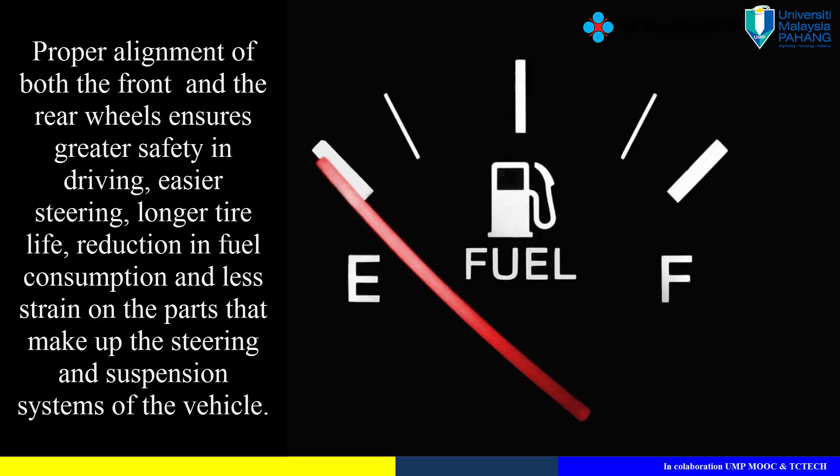Proper alignment of both the front and rear wheels ensures greater safety in driving, easier steering, longer tire life, reduction in fuel consumption, and less strain on the parts that make up the steering and suspension systems of the vehicle. The proper alignment of the suspension or steering system centers on the accuracy of several key angles.

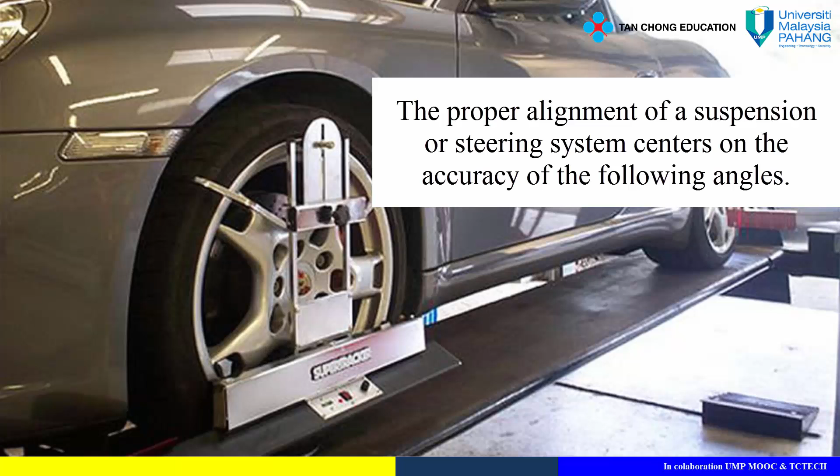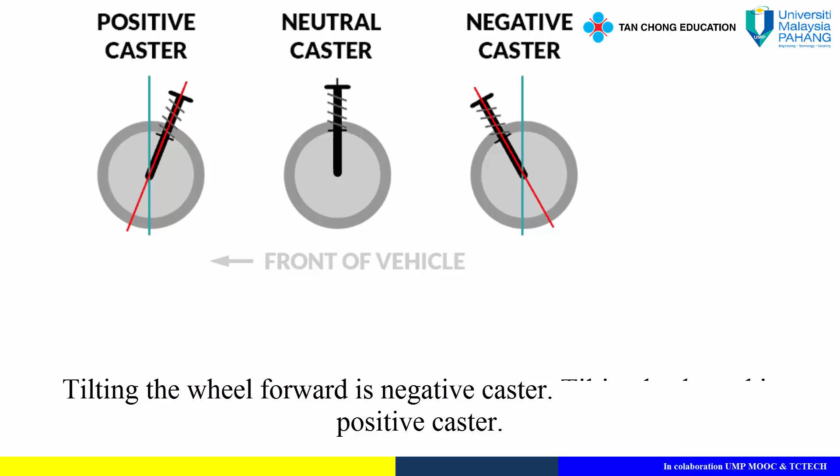Caster is the angle of the steering axis of a wheel from the vertical, as viewed from the side of the vehicle. The forward or rearward tilt from the vertical line is caster, and it is the first angle adjusted during an alignment. Tilting the wheel forward is negative caster; tilting backward is positive caster. Caster is designed to provide steering stability.

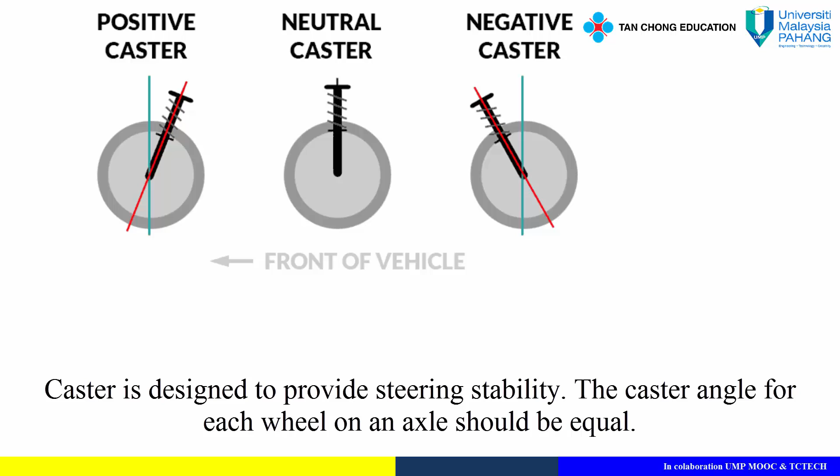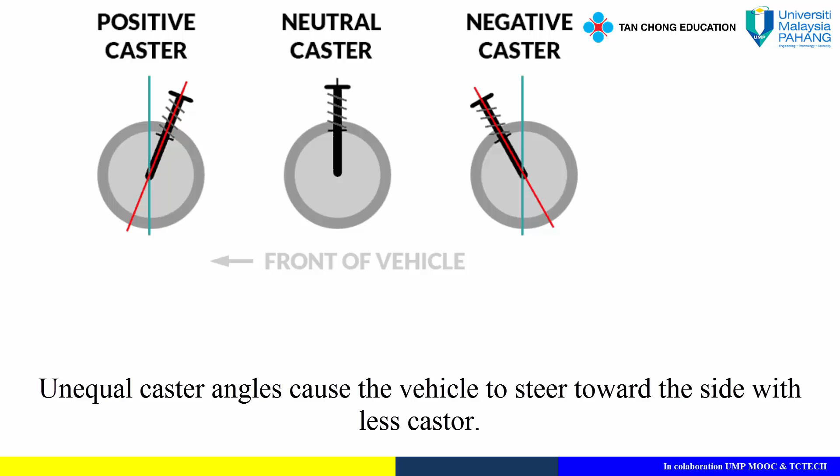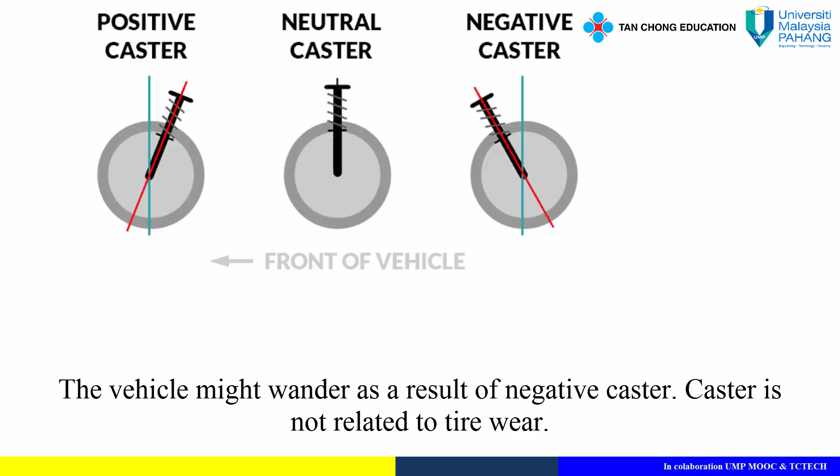The caster angle for each wheel on an axle should be equal. Unequal caster angles cause the vehicle to steer toward the side with less caster. Too much negative caster can cause the vehicle to have sensitive steering at high speeds, and the vehicle might wander as a result. Caster is not related to tire wear.

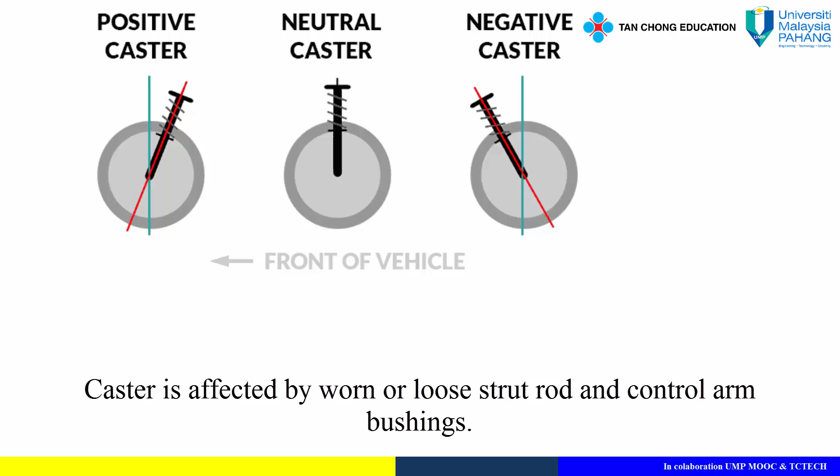Caster is affected by worn or loose strut rod and control arm bushings. Caster adjustments are not possible on some strut suspensions. Where they are provided, they can be made at the top or bottom mount of the strut assembly.

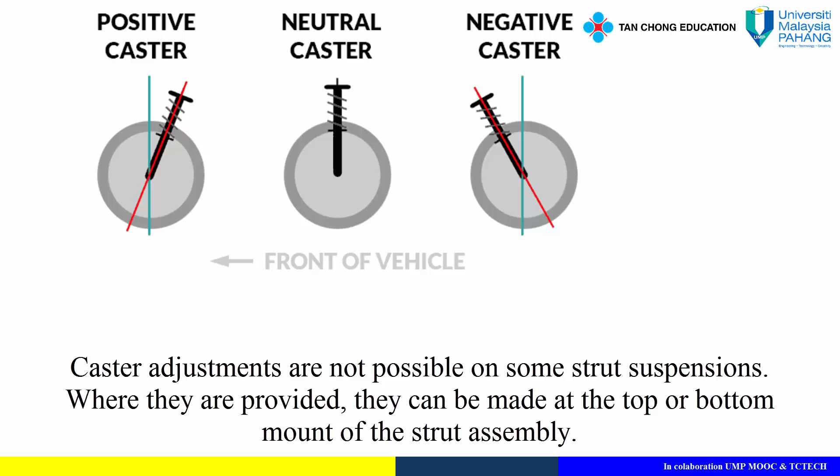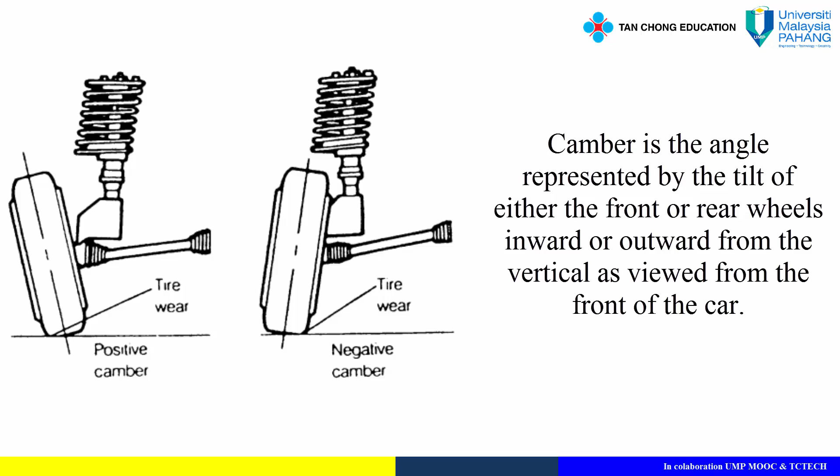Camber is the angle represented by the tilt of either the front or rear wheels inward or outward from the vertical, as viewed from the front of the car. Camber is designed into the vehicle to compensate for road crown, passenger weight, and vehicle weight.

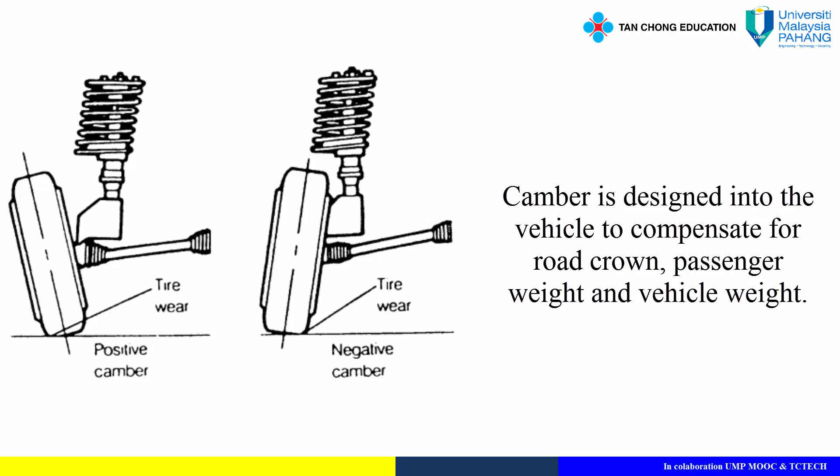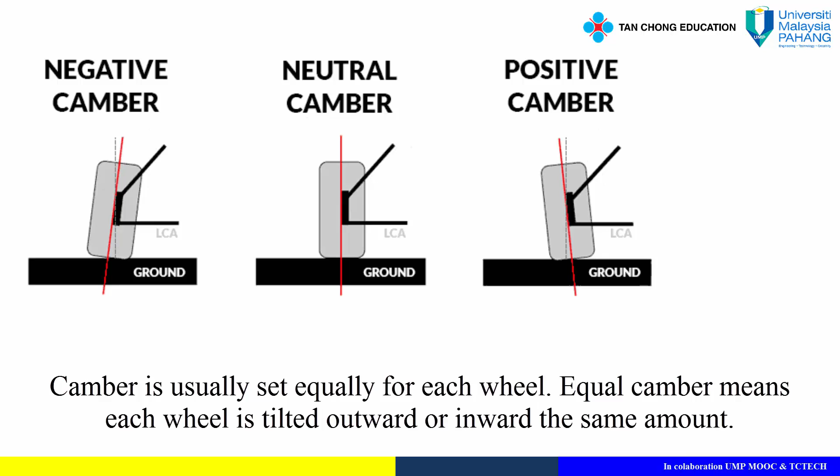Camber is usually set equally for each wheel, meaning each wheel is tilted outward or inward the same amount. Unequal camber causes tire wear and causes the vehicle to steer toward the side that is more positive.

Camber angle changes through the travel of the suspension system are controlled by pivots. Camber is affected by worn or loose ball joints, control arm bushings, and wheel bearings. Anything that changes chassis height also affects camber.

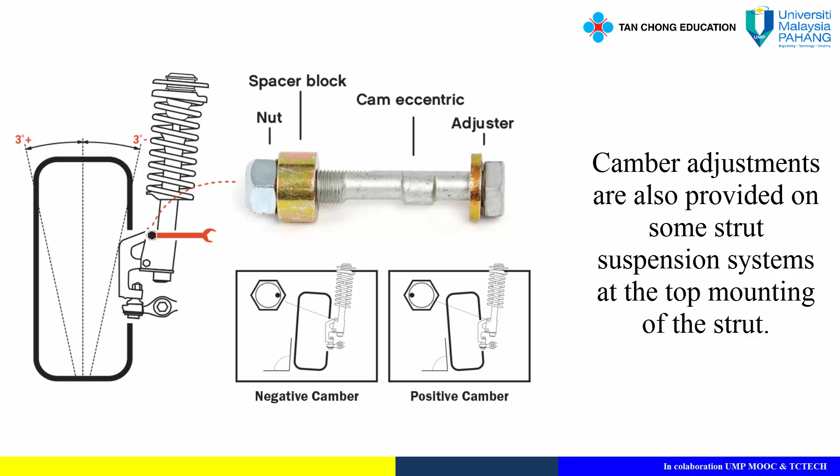Camber is adjustable on most vehicles. Some manufacturers prefer to include a camber adjustment at the spindle assembly. Camber adjustments are also provided on some strut suspension systems at the top mounting of the strut.

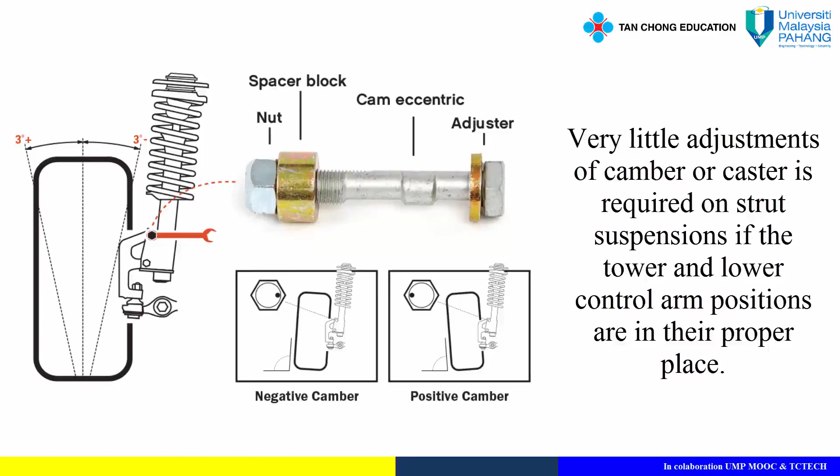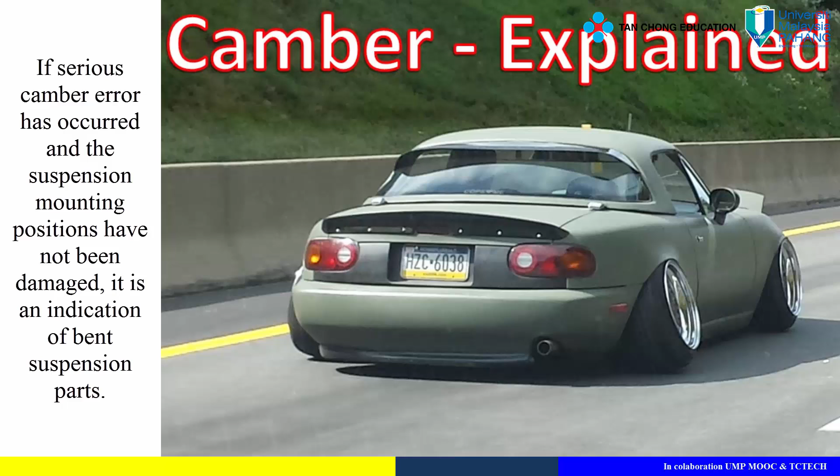Very little adjustment of camber or caster is required on strut suspensions if the tower and lower control arm positions are in their proper place. If serious camber error has occurred and the suspension mounting positions have not been damaged, it is an indication of bent suspension parts. In this case, diagnostic angle and dimensional checks should be made on the suspension parts, and damaged parts should be replaced.

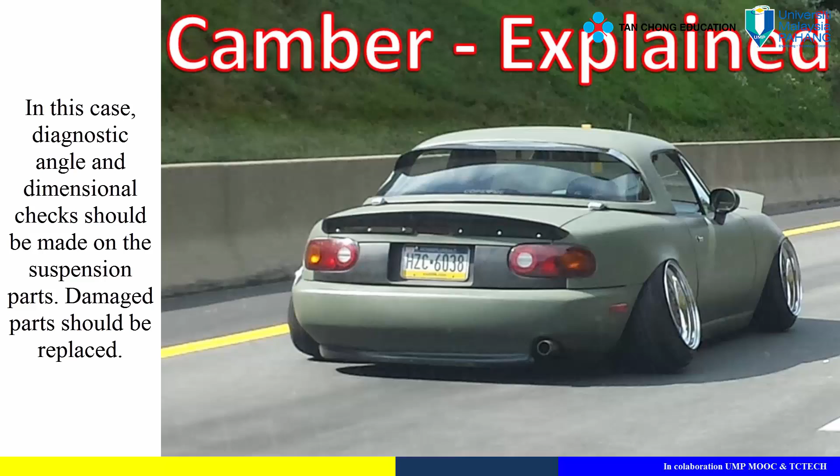Toe is the distance comparison between the leading edge and trailing edge of the front tires. If the leading edge distance is less, then there is toe in. If it is greater, there is toe out.

Actually, toe is critical as a tire wearing angle. Wheels that do not track straight ahead have to drag as they travel forward. Excessive toe measurements, either in or out, cause a sawtooth edge on the tread surface from dragging the tire sideways. Excessive toe in will cause tire wear on the outside edge of the tire, while toe out causes wear on the inside edge.

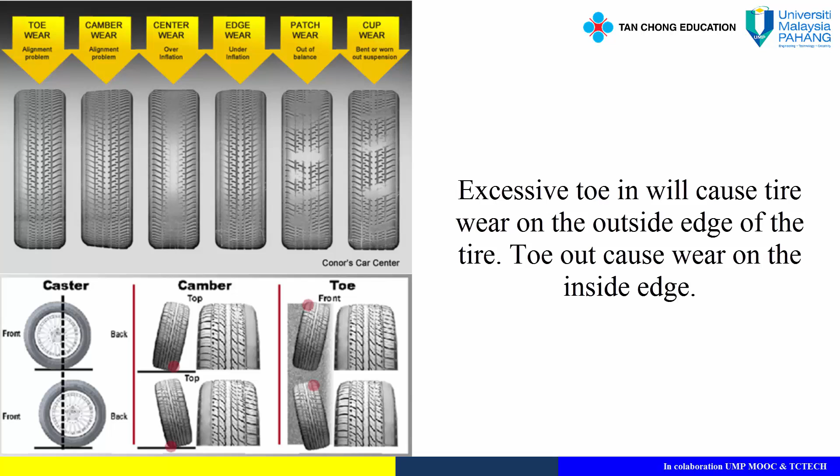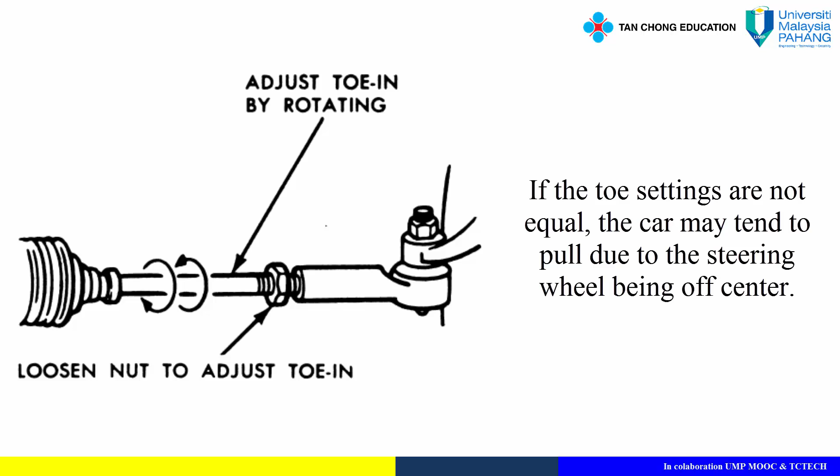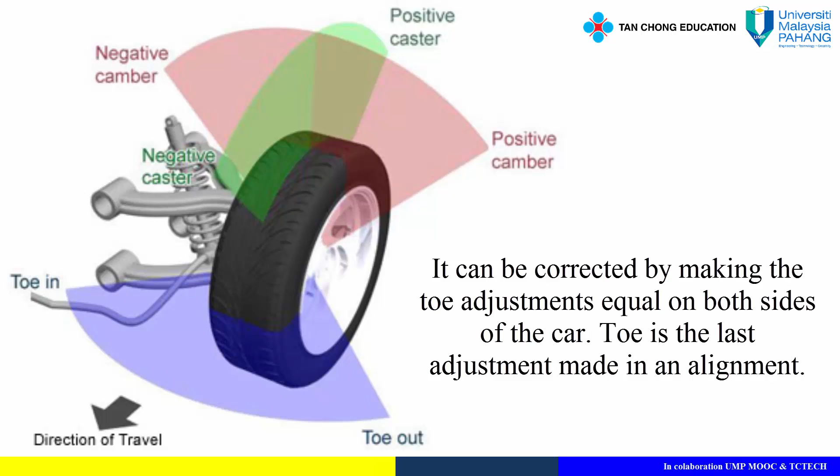Toe adjustments are made at the tie rod and must be made evenly on both sides of the car. If the toe settings are not equal, the car may tend to pull, due to the steering wheel being off-center. This pull condition is especially common with power-assisted rack and pinion gears, and it can be corrected by making the toe adjustments equal on both sides of the car. Toe is the last adjustment made in an alignment.